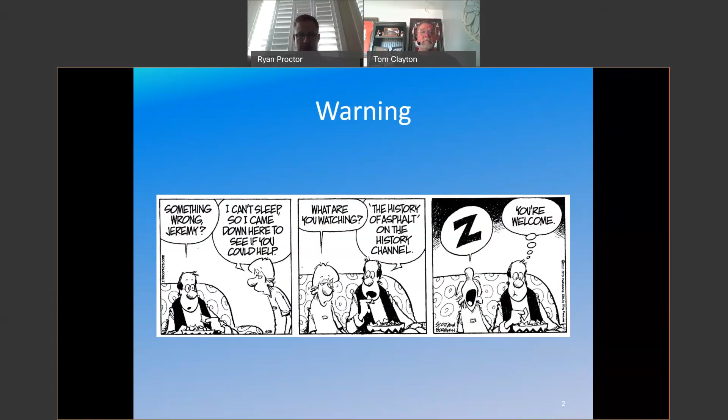So let's get started. Asphalt roads, why are they important? First of all, they're important because they're everywhere. Everybody drives on asphalt roads. They make up about 92 to 95% of the roads in the United States. I've seen some different stats there, so that's why I put the range in there.

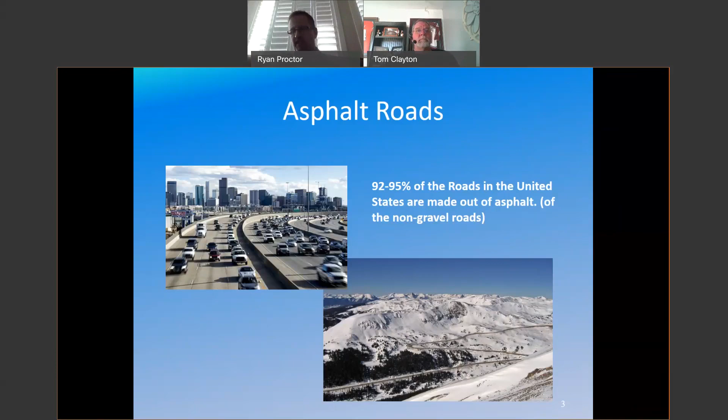But one of the key points about asphalt, and I'm thinking about Colorado specifically now, is we need an asphalt binder that'll work in the situation on the picture on the left with heavy traffic, slow moving, heavy trucks, and we need an asphalt binder that'll work on the situation on the right: colder climate, still a lot of truck traffic, potentially a lot of freeze thaw cycles. So I'm going to talk about what we do in the industry and what the specifications look like so that you get a binder. In some cases, you might get a binder that'll work in both situations, but I'll discuss that.

So before I talk about where we're at with PG binders, I really think it's important to understand where we came from. I won't spend a lot of time on these slides unless there are questions, but this is the beginning. There are naturally occurring asphalts in the world, and there are some that are still being used for pavement. They have some benefits, some different physical properties than some of the binders we make at refineries, but there's some downside to it. A lot of the asphalt binders, if you look at that little asphalt pond, just kidding, but there's fillers in there, solids that get put in there. You don't have a lot of control over what you get.

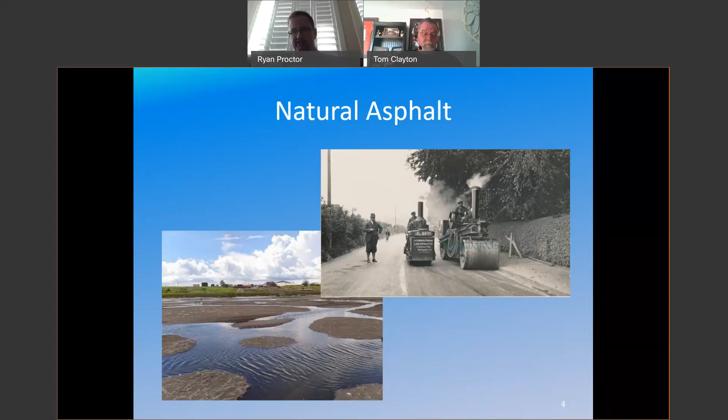You get what you get, and then there's logistical issues. We don't have anything like that in Colorado. There have been trials of projects like that in Colorado and around the West, but nothing recent. Shipping those materials in can be problematic and expensive. So going back to the old days of asphalt paving, I would summarize it as: you got what you got. There wasn't a lot of control, there wasn't a lot of testing. You got asphalt, so that's what we started with.

So the good thing is, compared to the previous slide, we're starting to get a little bit of control now. We can understand how soft our asphalt is at room temperature. We've come a long way since then, but that's really the first step in the process.

Another thing I'd like to mention before I move on - at Suncor, we have a refinery in Commerce City. This isn't really the way we look at it, but I've simplified a refinery down as much as I can. This isn't actually what it looks like in the field. We bring in crude oil and use multiple distillation units - sometimes with pressure, sometimes with vacuum. They all use heat, and they separate all the different components in crude oil. The lightest material might come off the top - methane, propane, for example, really short molecules. Then if you take off everything else we can sell - gasoline, diesel, gas oil, and other grades I didn't put here - what you're left with is asphalt.

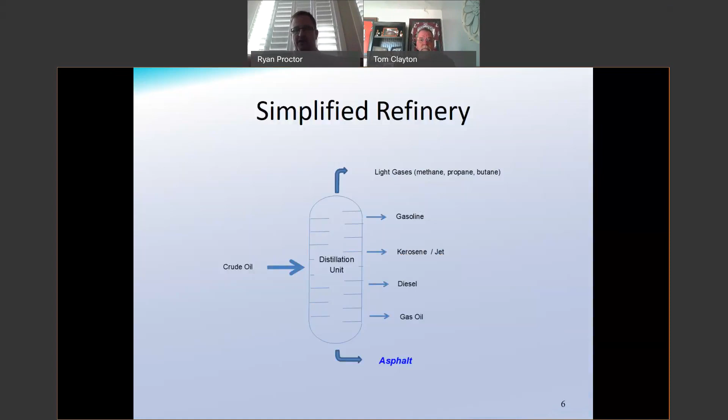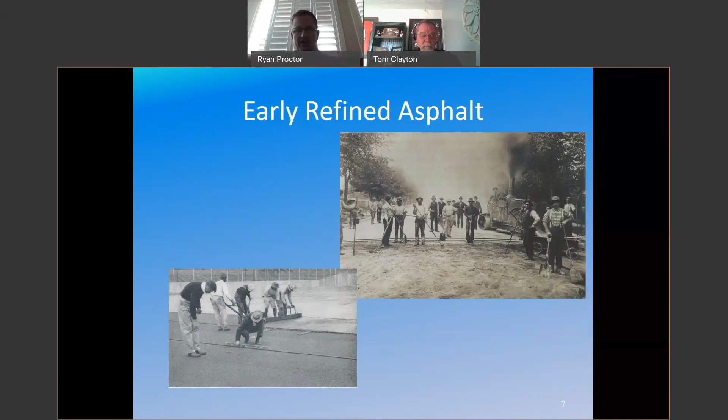So now we're moving forward a little bit. Along with early refined asphalt, where we had more control over what we were supplying, they had more control in the field with what they were paving. I'm not going to focus on that - that's not my point here - but you can see we're making incremental steps towards better asphalt pavements.

The next step, we have to skip ahead quite a bit here. All of these tests take some time to develop. So even though it was adopted in 1963, this test had been around longer than that, and there were some agencies that used it even before '63. This is the absolute viscometer - it might be hard to see that tube on the bottom with the white background.

First you put the sample in a bath, shown on the right, and you can run a viscosity test at a variety of different temperatures. Typically we'd run these at 140 degrees Fahrenheit, or a similar viscosity at 275 degrees Fahrenheit. You use a vacuum to start the asphalt going, and measure the time it takes to go between two marks on a vis tube. You run it a couple of times on the same vis tube and take the average. The thought behind this test is that the lighter, less viscous material flows through the tube faster, while heavier material takes longer.

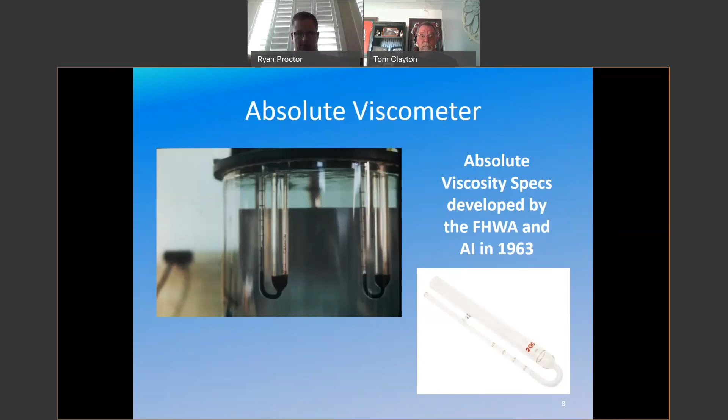At this point, we had a few other specifications. I'll mention Flashpoint and some of that later, but from a performance standpoint, it was predominantly viscosity and penetration, and we ended up with issues on the roads. If you look at road performance, how we do at 140 degrees and how we do at room temperature is somewhat important, but it doesn't tell the whole story.

So we saw a lot of roads that look like this. One other thing I should mention: obviously the asphalt binder isn't the only cause or potential cause of some of these issues, but at the time we felt like new specifications would help improve the binder and would help improve their performance, which would help reduce these problems.

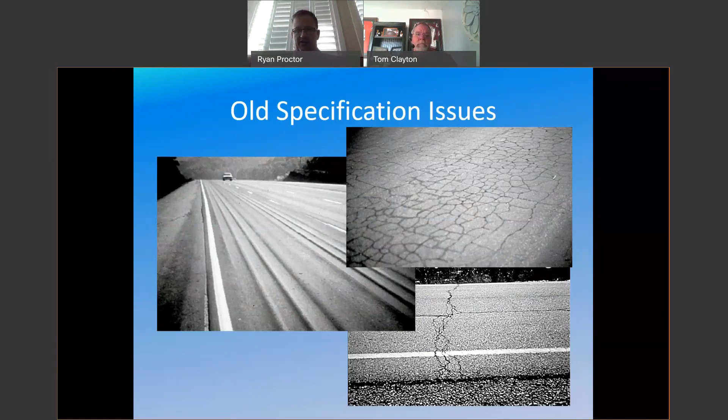So rutting was a big issue, cracking and alligator cracking, and I'll talk about those with the newer tests here in a minute. Anyway, that gives you some background. That's how we got to where we are now.

For the rest of the presentation, I'm going to focus on the PG grading system. I'm also going to talk about some of the tests that aren't part of the PG grading system that the Colorado DOT and other agencies still use across the country. We'll talk about binder tests, specifications, how we select binders, and then talk about their use.

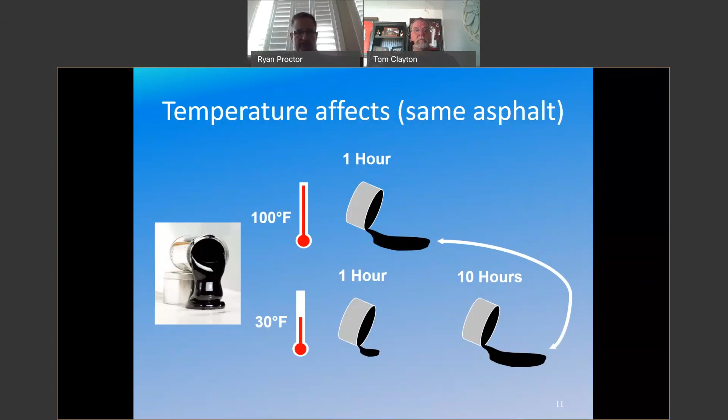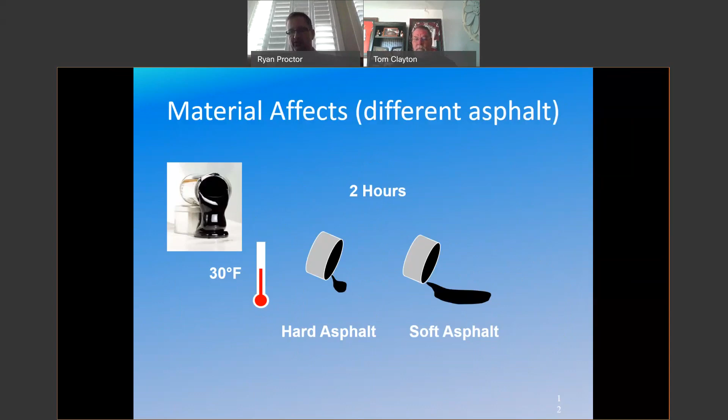Different asphalts are affected differently, though. You could take a different asphalt that meets the same specification, when we're talking about the old system, and it might take you 2 hours to do that. So what tests could we put in place to make sure that the asphalt binders we were using would perform in the field at the temperatures and at the truck loading levels and traffic loading levels that we needed?

This is an old asphalt slide. I took this from Marshall Shackelford. This is from the 50s, actually. And it shows again that if you're looking at T1, the bottom part of that graph is temperature. And those lines, if you will, are the performance of an asphalt.

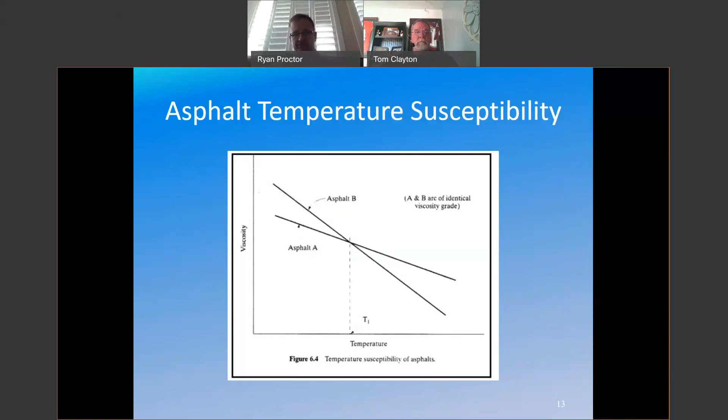So it's simplified, right? If you look at both of those asphalts at T1, at that temperature—whether it's penetration or viscosity—they could look the same. But if you look at them in the road, or if you looked at them in the lab under different conditions, they have very different performance. This slide really focuses on how temperature susceptible different asphalts are.

So that brings us to PG binder testing. There was a significant amount of work from the FHWA, the Asphalt Institute, paving associations, contractors—our whole industry was really involved in this effort in the late 90s, and it was to get the performance-related tests back into the system.

If you look on the bottom of that slide, right above pavement temperature, you'll see that we're looking at tests that cover a range. Minus 12 is just an example—we could look at tests that cover the range from minus 30 degrees or minus 36 degrees Celsius up to tests that are even higher than 135 degrees Celsius. The goal is to find out how the binder will perform at those different stages.

So at the colder tests, we're looking at cracking, and I'll talk about this later, but that beam—we're trying to get it to crack in the lab. The two middle tests are a DSR, dynamic shear rheometer. In that test, and I'll focus on this later, you're looking at the performance maybe under road operating conditions, with fatigue of the road over time and with rutting potential.

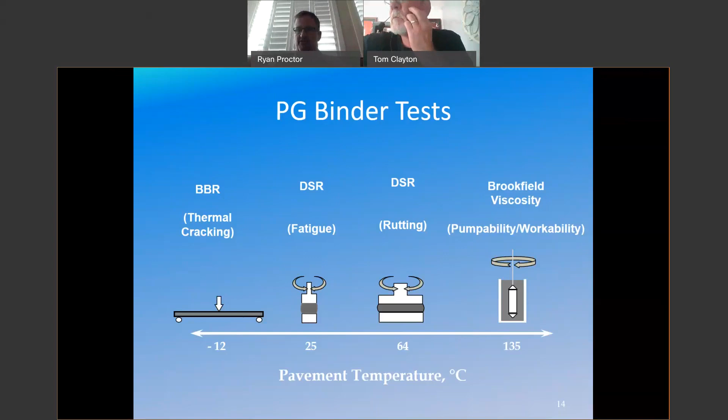And then as these new tests and new criteria were put in place, people were having issues making binders that had so much polymer in them that they couldn't pump them. So that last test on the right is really just to make sure that a hot mix plant can pump the material as they use it.

These tests are similar. There's a safety aspect to our testing as well. Flashpoint is something that is run at the refinery, even on the gasoline that you use in your car if you have a gas-powered vehicle. In that flashpoint, we heat up the asphalt until you can take a flame and brush it over the surface of the cup, and it gives you a flash. The goal there is that we would not want to give a paving contractor something with a low flash that they could have safety issues with their plant or smoking issues out with the community.

Another key point here with this testing is that it was very empirical, I think that might be the right word. It was very deliberate on how we looked at these tests, because we wanted something to simulate every aspect of what the binder would see in the field.

Prior to the rolling thin film oven, there was a thin film oven, and work was done to show that it didn't really age the binder the way a hot mix plant would. If you open up a rolling thin film oven, you'll see a fan, and that carriage spins kind of like a revolver, spinning like a clock. There's an air nozzle blowing air into those tubes. The whole point of this is to simulate the hot mix plant.

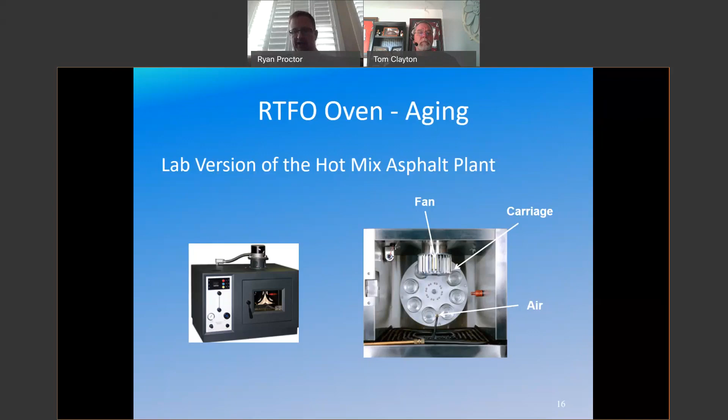Another point I should mention about both of these tests, actually 'test' may not be the right word, is that you're not getting a value. These are just conditioning steps in the process.

So the pressure aging vessel is similar. You put the asphalt on a pan on the left, and those PAV pans are very similar, and in most cases identical, to the old thin film oven pans. Those pans go into the pan holder on top of the machine, where you can put several pans in, and then they slide down into the pressure aging vessel.

The goal of that apparatus is to simulate what the asphalt binder looks like when it's been on the road. I don't want to talk about time frames because there's been a lot of work with different conclusions on how much road time this really simulates, but the goal here is to simulate what happens in the road.

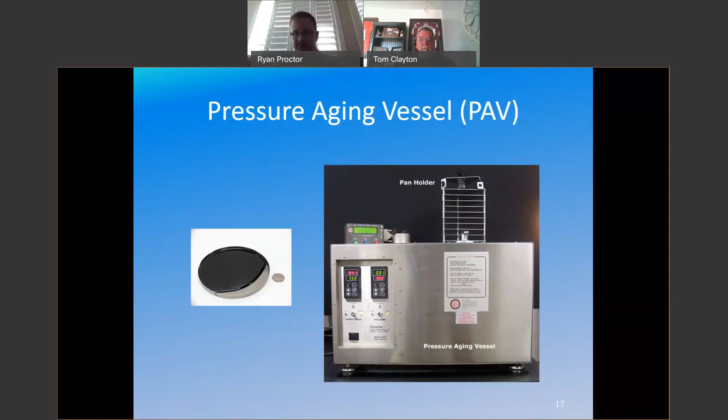Another point to mention is that this oven was set up so that if you were specifying something for cold weather in Canada, you wouldn't heat it as hot as if you were putting down asphalt in Death Valley, California. This test takes about 20 hours, roughly. There are some steps you need to do with the samples before and after, and this takes about a day after everything's done.

This is the flash point, which I mentioned earlier. This is more for safety than anything else. We've used this in the industry for long periods of time, well over 50 years. Again, the goal is to figure out at what temperature the asphalt can be heated to where you would get a flash or a flame over it. One of the things this also helps protect against is...

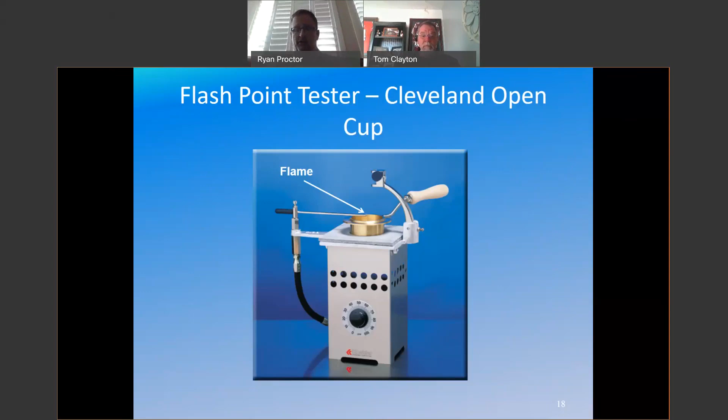Everyone at some point or other around the country has had somebody approach them about putting other materials into asphalt. And we would not want, as an industry, to put anything in asphalt that would put anybody at risk.

And you're measuring the resistance to that force. So the more viscous the asphalt is, the slower and the more resistance you get when you spin it. Again, the original point of this was for pumpability.

Needed to make sure that these new polymer systems that were being used could work in a hot mix plant. But another thing that we use this for is a temp vis curve. I can talk about that later if somebody wants to know more about it.

But the goal behind that is that a hot mix asphalt plant and a hot mix asphalt mix designer would know what temperature to mix the asphalt binder at. And then in the field, there are a lot of factors that affect it. So it's not by itself the exact guide to what you need to compact it at, but it's a good starting point on the temperature where you can start to get compaction with that binder.

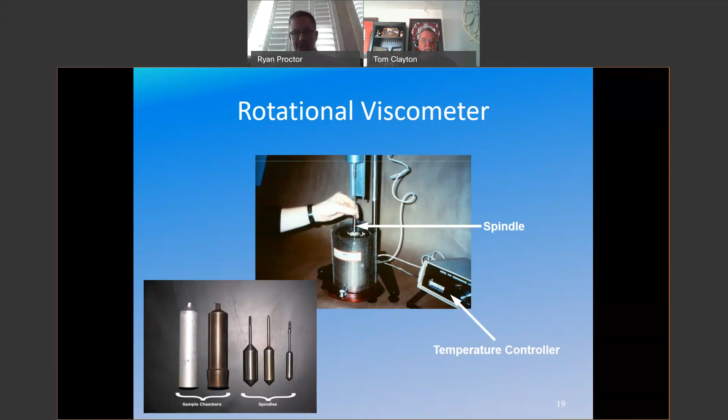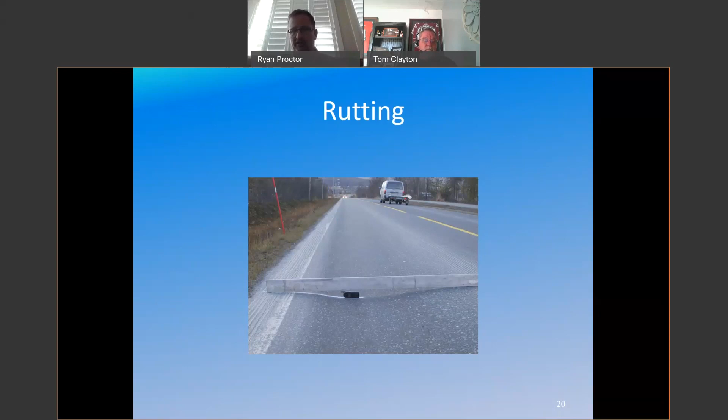I have a worst case in this, but it wasn't feasible. You can see from that phone that it's a pretty old picture, right? We don't have phones like that anymore, but this is what we're trying to avoid.

So this is the DSR. It kind of looks like a UFO in my picture, but if you look at the top left picture, it's a flat plate with a spindle on top of it, and it's oscillating back and forth. The rotational viscometer spun around continuously.

This oscillates back and forth, and it makes very small movements. So if you look on the top, I have a point B, A, and C. And then if you look at the graph there, it goes, if you're looking straight at what you would see in the test, that plate would oscillate to where you would look at A, then B, then A, then C, then A. That gives you an idea what the oscillation looks like.

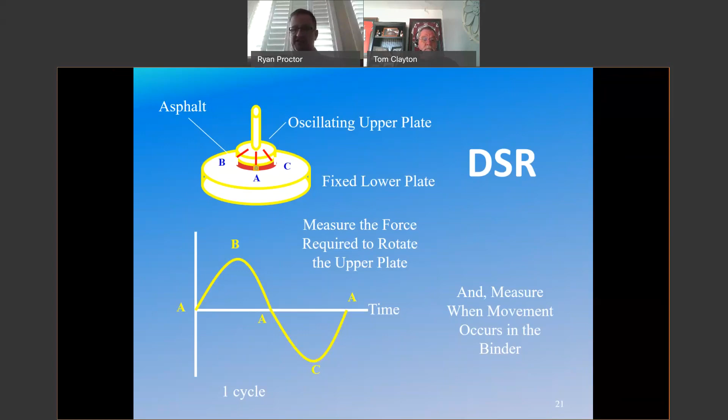The lower plate is fixed. So what happens is if you have an asphalt binder sample on top of that, I mentioned that it works somewhat like a solid, somewhat like a liquid. The reaction time will be different than when you put the force on there.

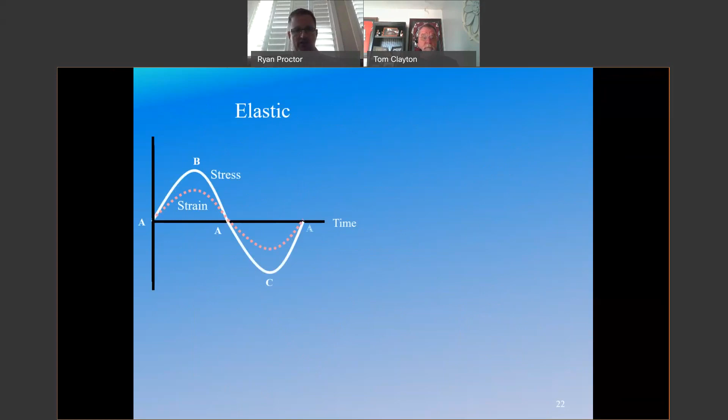So this is what a DSR looks like. The machine is putting a stress onto the sample, and the strain is the reaction that you're measuring. I've oversimplified this. Again, if somebody has comments or questions, we can talk about this further.

So in an elastic sample, let me just skip here. You can see that when something is viscous, this is kind of my definition. It's very thick. It's the honey or molasses part of it, or peanut butter even, that resists change. It's more of a solid.

When it's elastic, it's different than not being viscous. An elastic material has a lot of stretch to it, where you could stretch it and expand and contract it. It'll have a different reaction.

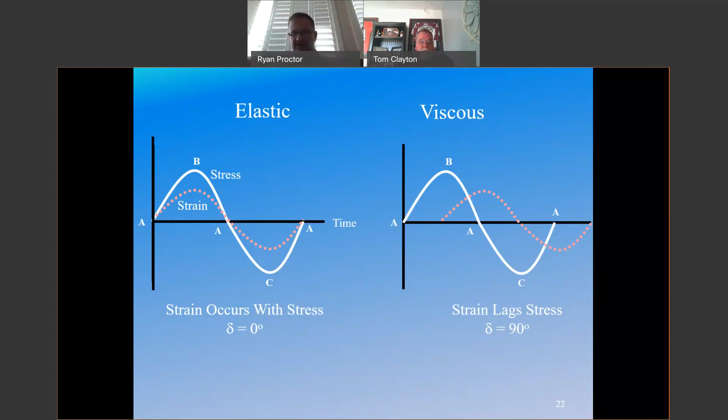So how do you avoid something like this? Well, the first thing I'd say is you have to understand what the asphalt binder's role is in the material. When the pavement temperature changes, the asphalt needs to be able to expand and contract, because as the temperatures cool down, it doesn't matter what the substance is, they all do it to different degrees, but the asphalt binder is going to contract. It's going to get cooler. And if you don't have a way to relieve that, you end up with a crack. So all of the pressure from this asphalt road was focused on that point, and it cracked.

Ryan, go ahead. I've seen cracks like that in Colorado Springs, just in case anybody's interested, they do happen in Colorado like that. I just didn't want anyone to think I was bad mouthing our roads, but you were right.

This road was so bad that the trucks, this is not a joke either, the trucks were going 40 or 50 miles around a specific road because they didn't want to have issues with their brakes and shocks. And those cracks were every, I don't know, 10 to 15 feet for 10 miles.

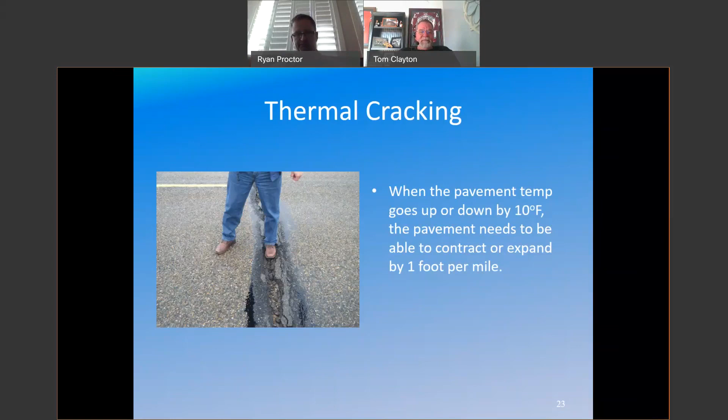So the bending beam rheometer, the goal of this test is to look at the asphalt and see how it's going to perform in cold temperatures.

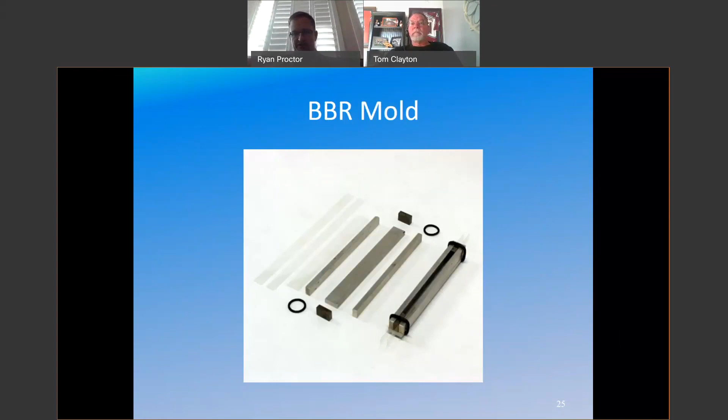That's very solid. That material gets put into a bath. I'll talk about the PG grades here in a minute, and this is another one I can explain more on if people have questions, but we're putting these samples in 10 degrees warmer than what the specification calls for, and that all has to do with the timing of the test.

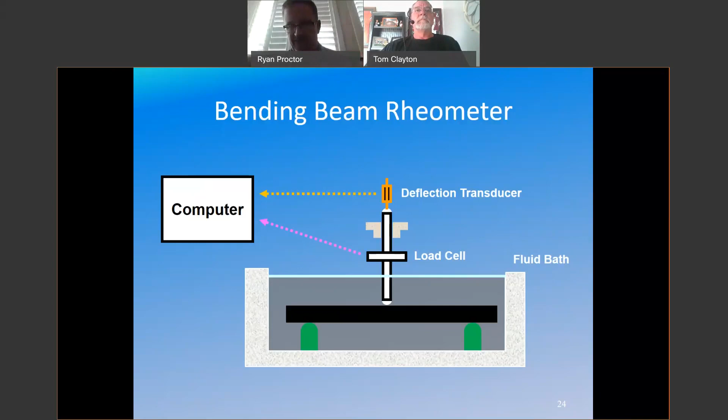It's very complicated. So this material, I kind of think about it like a stick. If you see your kids trying to snap a stick in half, it's similar, except instead of using force on the ends like I'm doing, we're holding those ends in place, and then there's a rod that comes down and pushes it, and it starts to deflect it, and at some point it'll snap it. So I talked about the mold.

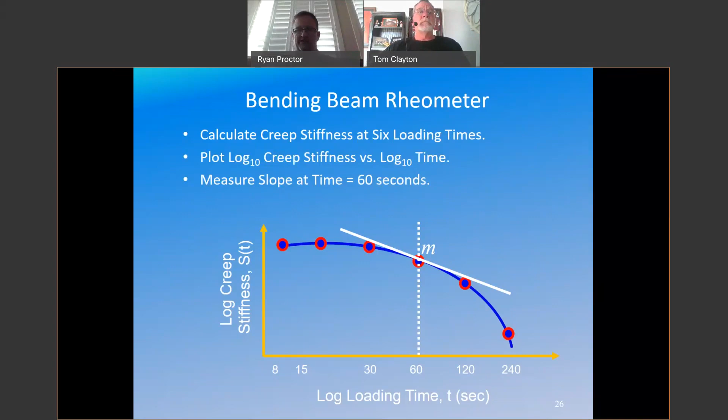All right, last set of issues here. Fatigue cracking. This is one of the harder ones to troubleshoot, and I think our thoughts were really in the right place as an industry, but the test I'm going to talk about hasn't completely fixed this issue, obviously.

So the test to try to prevent that is another DSR. This DSR we were running after the PAV.

So let me back up before I go on to the PAV DSR and tell you that with the DSR, there's really three different times that we're looking at it in a pavement's life. We look at an original DSR, so what that material looks like when it's being shipped or stored, either by the refinery or the hot mix plant. Then we look at it after the RTFO test. We want to see what that binder is going to look like before it's being put down on the road or as it's being put down on the road. And then finally, after the PAV test. So this test is to try to simulate what that binder will look like after it's been on the road for a different amount of time.

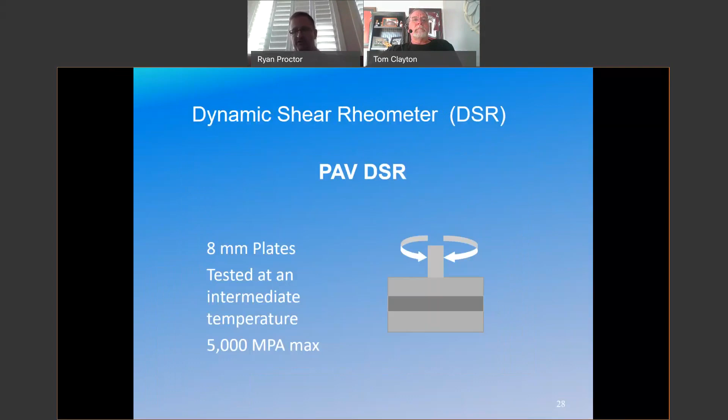We're not as confident about this as we used to be. There are also binders in other places - not really affecting Colorado - based on the crudes they use, that are over 5,000 all the time and people don't see issues. But it's still a specification, something we don't have an issue with. The mix, and how long the mix has been down, also play a big part in this issue.

If you think about that RTFO carriage that's rotating, we can take an asphalt binder - it's kind of like running a moisture value on an aggregate or hot mix sample. We'll weigh the asphalt before we put it in the RTFO, and we'll weigh it after. The goal of that test is that we don't want a lot of light ends or material burned off in the hot mix plant. When that happens, you're more likely to see smoking issues, odor issues, or even a safety issue. The loss on heating test and the flash point, for the vast majority of the time, have eliminated those issues. But it's important those tests stay on a specification.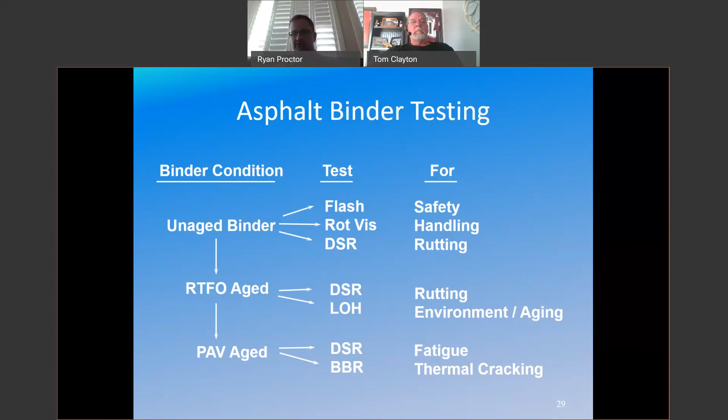All right, SHRP plus tests. I'm not going to go all the way back to the beginning of my presentation, but I did skip some things. When I talked about penetration and absolute viscosity, I even mentioned thin film oven. Before the Superpave effort put in all these specifications, people came up with their own systems to measure some of the same things. These SHRP plus tests - I'll talk about a few of them, there's actually quite a bit - are older tests generally that look at performance in a different way.

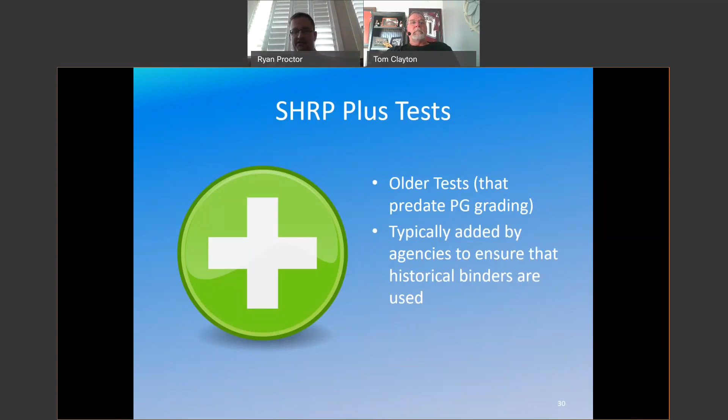Why they usually still exist - Colorado is a good example. Before CDOT had 64-28, they had AC20P and AC20R, which really covers our whole region. When they went to PG 64-28, they still liked some of the performance they were getting from these tests, and they left them in place. Across the country, that's usually what you'll see - people like the performance these SHRP plus specs gave them. So what they might do is specify, like in CDOT's case, a 64-28, and then add some of these other tests.

This is one of the tests you'll see in Colorado. I'm really going to talk about two tests here - they're similar in some sense. You look at that mold in the top - you put asphalt into a dumbbell shape. Different specs have different sizes, but they're all somewhat similar. Then they go into a ductility bath, generally at room temperature or 4 degrees Celsius. For ductility, they pull these out slowly until they break, and when they break, that's the value you get. So the more elastic polymer and binder you use, the longer those tests go for.

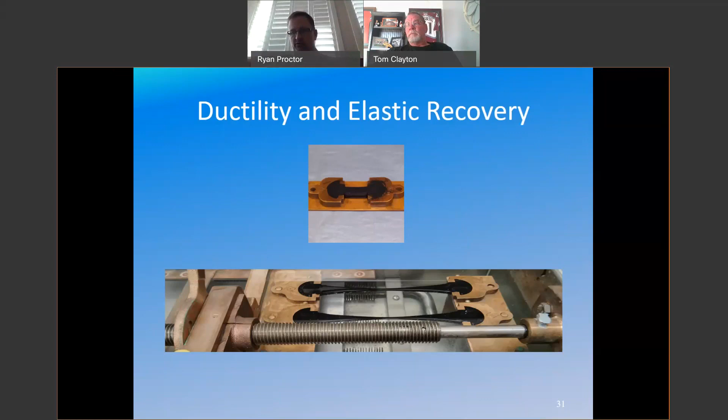With elastic recovery, you cut the test either at 10 or 20 centimeters, and measure those little end pieces - over time they shrink back. Again, the more elastic the material is, the more elastic recovery you'll get. If you look at the country, you'll see elastic recovery used a lot more than ductility. But in our region of the United States, it's really the opposite - a lot of the states were using the old AC20P or AC20R specs, and they liked the performance they were getting, like CDOT.

This is a toughness and tenacity spec. One of the first toughness and tenacity machines in existence was housed at the Commerce City Blue Knight plant - when Koch had it, when Conoco had it, going back in time. That test was really developed here in this region of the United States, and is still used by CDOT today. In this test, you take a pin tin, put some asphalt in the bottom, and pull the material out, ending up with a graph like what you see on the right. There are two measures you're trying to find: the toughness, at the highest point - when you get the most force, not the highest movement but the most amount of force. And the tenacity is the area under the curve if you take out that initial peak.

Again, it's a complicated test, and a lot of people still like it. If anyone has specific questions, we can talk about it later. But this is another test where you're trying to balance two things: you want enough stiffness and toughness in your binder that it can resist the force, but you want enough pull or give that you can get that tenacity.

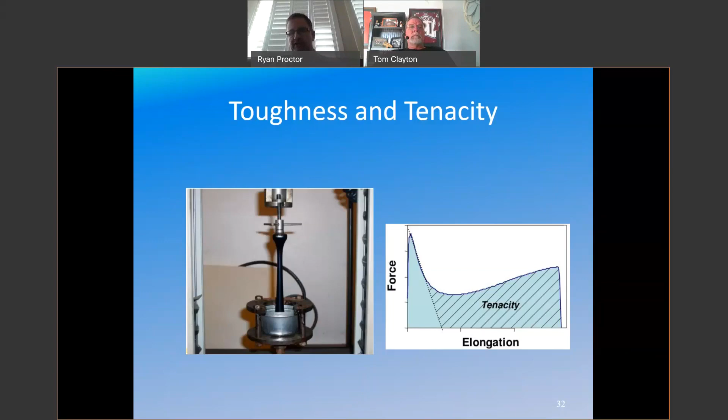We could use polymers — we wouldn't supply these to the DOT or anybody in Colorado — but you could use polymers that give you one component and not the other very easily. If that happens, you might be able to pull this sample up to the point you see on the left, and it would break right there. Those aren't binders that CDOT wants in their roads.

All right, hopefully I got through the most technical part of this. I apologize for that, but I think it's important to understand the tests, why they're in place, and what we're trying to prevent, so that now we can talk about what that means for grade selection.

Similar to the testing portion of the new set of PG specifications — and I need to stop saying new, it's been over 20 years — the goal was to make sure you could look at your location, figure out the traffic, figure out the climate, and pick a binder that would meet that need.

When you look at rutting, there are a couple of things that cause it. I'll talk about traffic in a minute, but the other thing is really, really hot days. If it's 30 degrees outside, you're not going to see a lot of rutting unless you really have an issue with the binder, a big truck, or an issue with your base. But I'm focusing on the binder component of this.

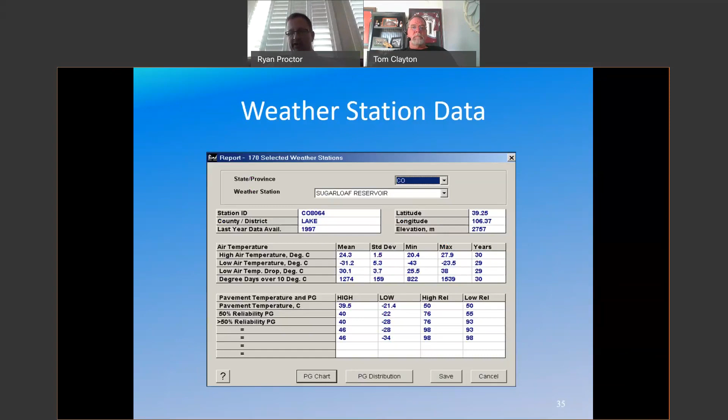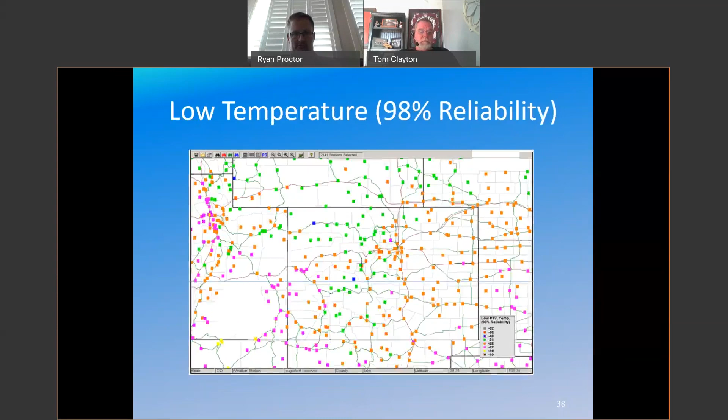All right, I mentioned this earlier — there's two other things to factor in though. There's a traffic adjustment portion that you can factor in. An ESAL is an equivalent single axle load.

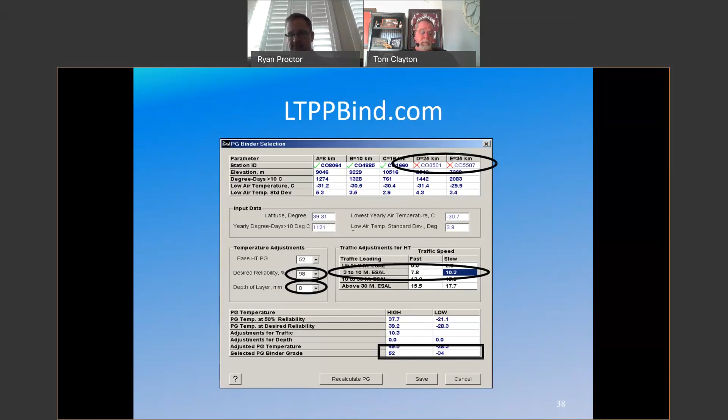To oversimplify this, you want to make sure you're accounting for truck traffic in the way that you should in this equation, because trucks do significantly more damage to a road than cars do for the most part. Using this modification, you can figure out what the traffic's going to be. I'll talk about that adjustment in a second, but before I get there, you can sum up everything I just told you into these next couple of slides.

PG grading, or performance grading, is how we classify a binder. In every example, the first number is in degrees Celsius, derived from the 7-day average maximum temperature of the pavement, because that's generally when you're going to see issues. Fatigue cracking is more of a long-term effect, but if you're going to see rutting, it's generally in that time frame.

The second number is in negative degrees Celsius—it's not a dash, it's a negative value—and it comes from the lowest single temperature of the pavement. When I talked about the DSR tests, I skipped over the temperatures, and same with the BBR test. You'd run those DSRs for this binder at 64 degrees Celsius, and for the BBR, as I mentioned, it's complicated, but you'd run it at negative 18 Celsius. Both of these numbers are adjusted in 6-degree increments.

I'll give you an example, though I don't have it in here. If you looked at your weather temperature and traffic, you might find out you needed a 61 minus 24. Well, people don't supply 61 minus 24s. If we did that, we'd have to have significantly more tankage at these terminals, at the hot mix plant and at the asphalt terminal. So you round up and you end up with a 64 minus 28.

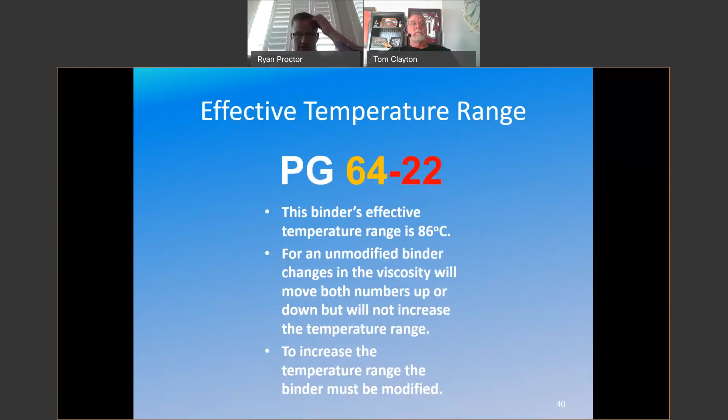An easy rule of thumb to determine if a binder is modified or not: if it's under about 92 degrees Celsius, it's usually unmodified. If it's over that, it's a modified grade. So for 64-28, if you take the difference between them, you're at 92—it's a modified grade. 64-22 is not. All right, polymers.

Polymers, when we first started using SuperPave, got a lot of attention. Then for a long period of time, people didn't seem to focus on what polymers were being used anymore. And I'd say in the last, I don't know, 5 to 10 years, polymers are a big focus again, but it's more about the sustainable recycled material type of polymers. So I'm going to try to talk about both of them.

Polymers are a tough subject because they're very specific. You can take a polymer with one asphalt and have it work great, and then take that same polymer and send it to a refinery or a terminal in Florida, and that might not work at all. So they're very asphalt specific. They're used in emulsions, and what they really do is provide a lot of strength and elasticity to the binder. Not sure why I put that chemical in here, but just to give you an idea, they're very complicated.

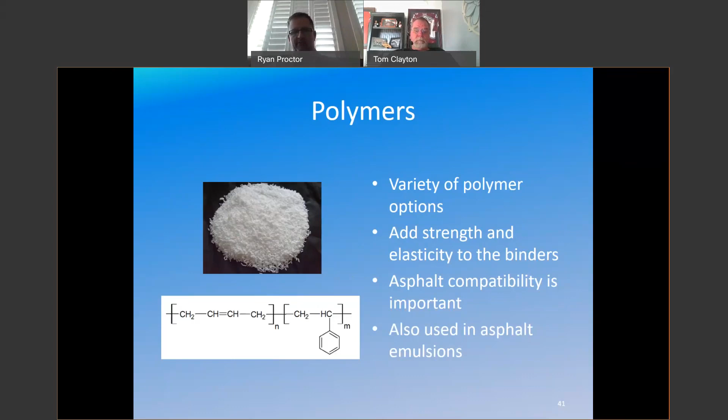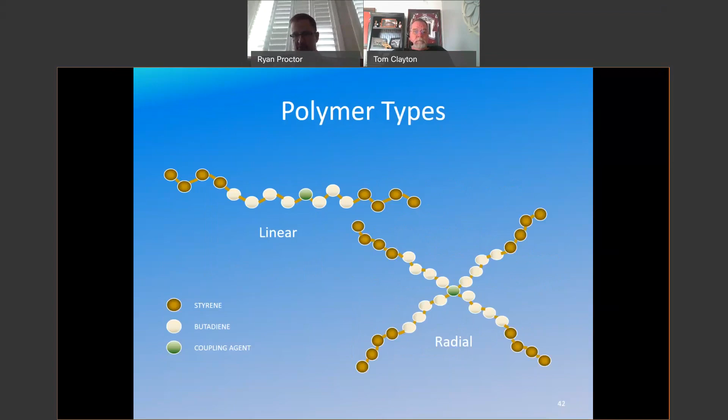We use a couple of different polymer types for the most part. The sustainable recycled materials don't really fit into this category, but we use linear polymers and radial polymers. Those radial polymers can look like spokes—they're more three-dimensional, and they give you more viscosity, more toughness because they really bind up that asphalt. I could have a whole presentation just on polymers, so if somebody has questions on this aspect of it, let me know when we're done.

So, other modifiers. It's hard to make a blanket statement about anything, but as I mentioned before, there are all kinds of other modifiers out there. There's rubber modified asphalt—you'll see that predominantly in Arizona and California, although a variety of states have looked at it at one point or another.

Polyphosphoric acid is prohibited for use by CDOT, but there is an acid that can be used that doesn't work quite like a polymer, but it increases the asphalt's resistance to rutting. Alkali modification isn't something I know of people using in decades, but that's another thing that's prohibited. You could take a base or caustic and do something similar to polyphosphoric acid. When people used to do that, they had issues with storage tanks or trucks because some of these materials can get corrosive.

Then the one that used to make big headlines in the last couple of years was re-refined engine oil bottoms. There are companies out there that take recycled motor oil, and they do more than just clean it, they'll put their own package and additives in there. Some people have used that with asphalt binders. That's not something typically used in Colorado, and I don't think it's been used in Colorado for a long period of time. There are no plans to use it, but it's got a bad name out there, and I just wanted to explain it.

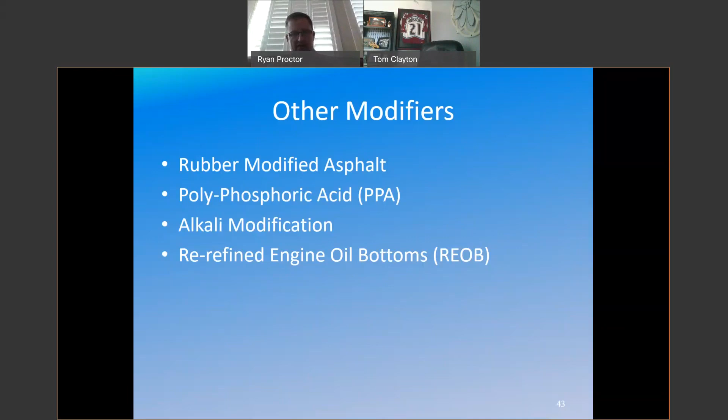So this test is going to be a challenge without getting technical. If somebody wants to talk about MSCR or creep recovery, I think we're going to have to talk about it afterwards. I just want to bring it up because this is one of the new trends out in the industry.

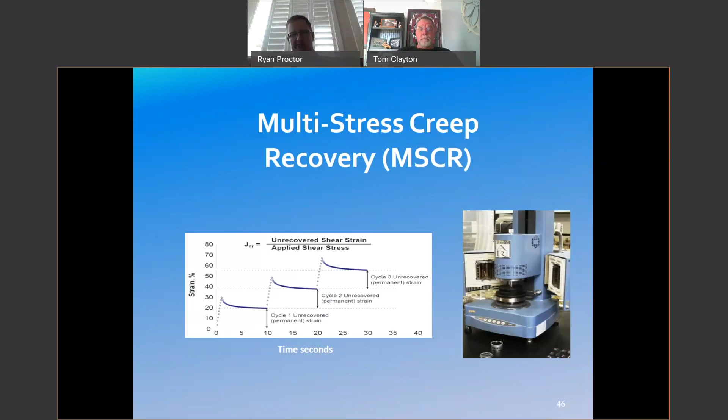This test takes a look at different stress loadings, and you kind of look at it like an elastic recovery. If somebody here knows this test, they probably think I'm crazy. But what you do, if you think back to that DSR where that spindle's rotating on the top, you put a stress on it, you let it relax, you put a stress on it, you let it relax. And you're measuring how much it's relaxing. So if you had a really elastic polymer or binder, it's going to relax a lot further than if you have something rigid. That's what the test looks like. You can see where you add the stress it goes up, and when it relaxes it goes back down.

We also look at peak strain, which is the highest value you get, kind of like a toughness and tenacity test. This test uses existing equipment, which is good, and tries to combine some of the facets of the PG Plus specs. There was a movement for a while to replace some of the DSR tests with this.

In fact, if you look at AASHTO, there's a new table that specifies PG grades using just this test. A good example of that is the state of Nebraska. Nebraska uses this all the time, and they have a very different binder grading system than what we have in Colorado.

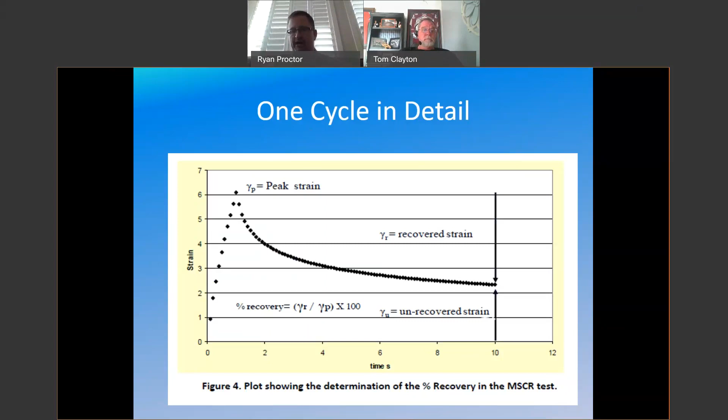All right, this is the time where I try not to, but I end up getting on my soapbox, so I apologize. First of all, I think it's important, and what I'd like you to get out of this, is that the binder tests are very methodical, and the goal is to predict performance. We've come a long way in a relatively short amount of time.

This PowerPoint would be outdated in a couple of years because right after this, we'll come out with something else to try to get even better performance. The asphalt binder specs are based on climate and traffic. It's very important to understand that.

I would also add that there's a reason we do them in 6-degree increments, and that's because it's not really feasible to have a hot mix plant with 8 tanks for binder if it's a small plant, or a specialty plant that might have 16 different tanks in place. It's always nice to think about other binder grades we could use, but it's not always that simple just to add them. We're always looking at new tests.

Another thing I should mention is that we're always looking at new polymers and new modifiers. I think it's important to try some of the new options that are out there, but also important to get another point of view on those as well. If someone's got a new way to do it, and they've tried it with a different firm or a different agency, those guys might give you some insight on what worked or didn't work well with them. CAPA is also a very good resource for some of these questions.

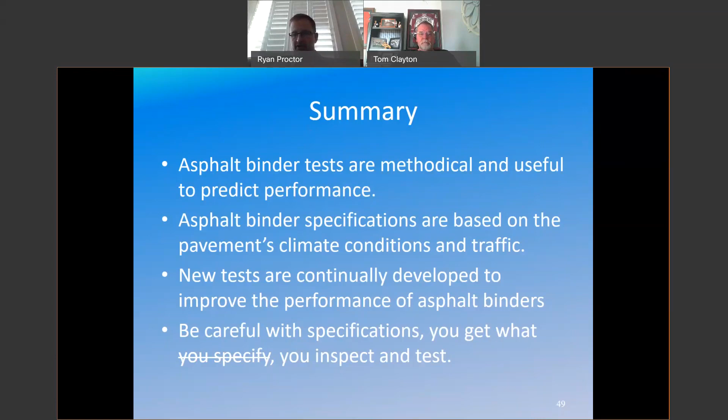And then finally, be careful with specifications. I didn't really talk about it a lot, but as specifications change, people tend to drop some of the old specifications. They think they don't need them anymore because they have the new great specification. That might be the right answer, but it also might completely change the binder you're getting if you remove the specs. So it's important to understand the whole picture when you put a spec together. And then finally, you get what you specify, but you really get what you inspect and what you test.

So hopefully people are still awake. There are a lot of things I brought up that I think we could spend more time on, but if anyone has questions, I'd really like to talk about whatever you guys want to hear more about. Thank you.